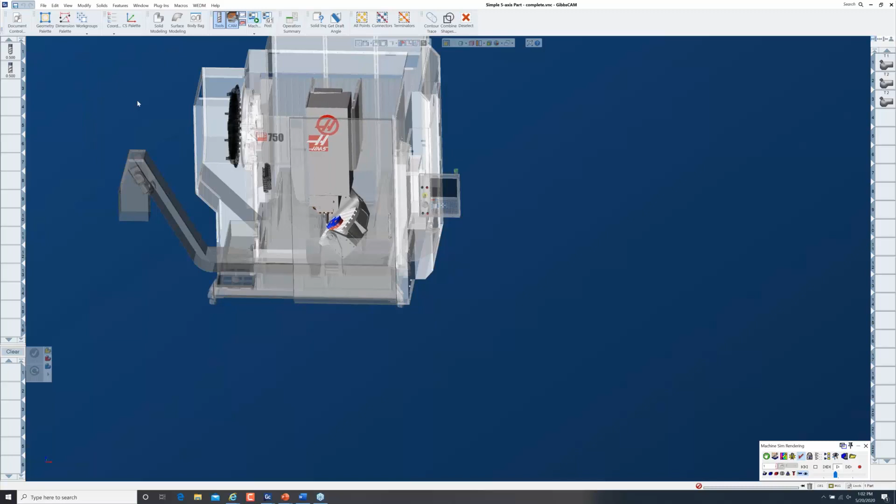Over the last 38 years or so, GibbsCAM has built their reputation by simplifying complex CNC programming. Part of the simplification is simply organizing the information and parameters needed to fit the way a machinist thinks, the way that a machinist basically approaches machining a part.

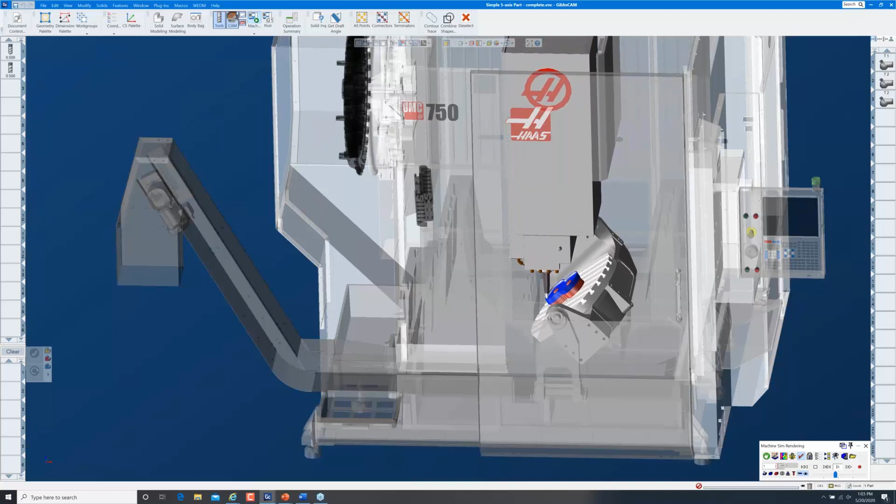By effectively streamlining and organizing the input of parameters and minimizing how many parameters you have to deal with, GibbsCAM shortens the learning curve, greatly reduces programming time, and most importantly, leaves you in control of as few or as many of the details as you want or need to be in control of.

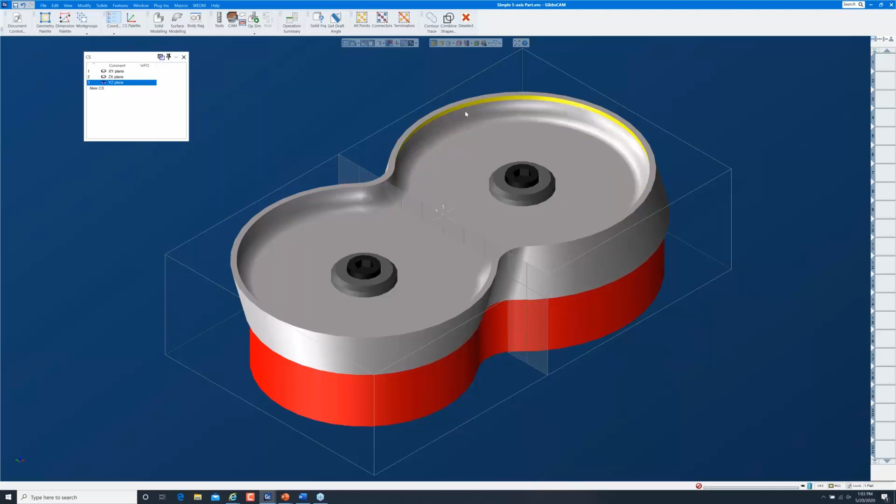All right, so here's the part we're going to be looking at. Let's see how this toolpath was developed. To start off with, I'm going to take a look at what we have to deal with. What I'm concerned with right now is machining this radius here. I'm going to turn on the profiler for a second and go to an end view here.

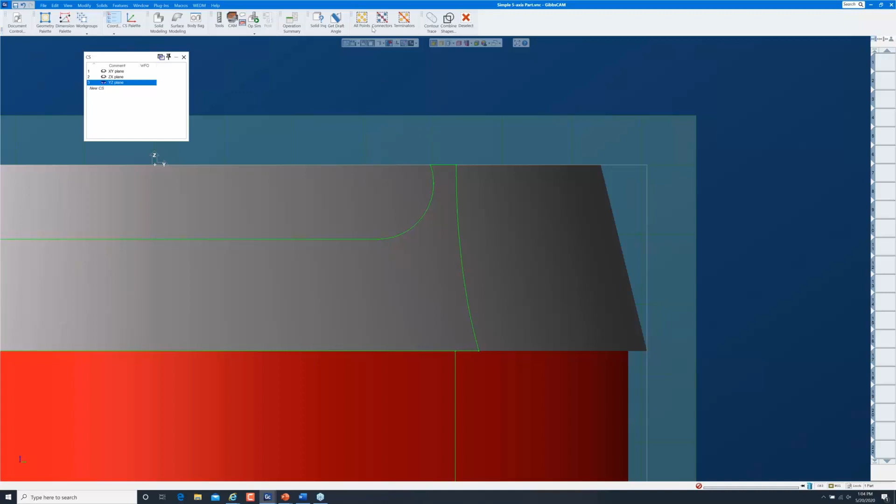Right here you see that this radius is actually undercut slightly, which would make it really impossible to machine with a ball end mill in a 3-axis machine. So we're going to machine this in 5-axis mode. Additionally, if I take a look at that radius, it's just under a 3/8 radius, so we'll machine that with a 1/2-inch ball mill. So let's get started putting some toolpaths together.

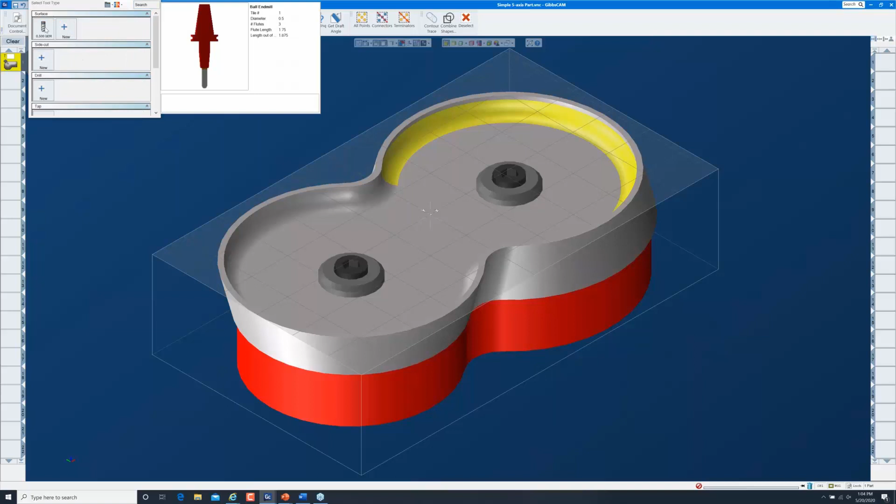So I'm going to open up my CAM and create a 5-axis process. And I'll select this 1/2-inch ball mill. When I build a 5-axis process, I'm presented with a dialog specific to 5-axis processes.

Just like any other GibbsCAM process dialog, it separates the groups of parameters and controls into individual tabs. Within those tabs, particular types of parameters and controls are separated into different areas. This makes it a lot easier to focus on individual toolpath control challenges and really helps you focus on the trees rather than getting bogged down in the forest.

When you're programming complex parts, the job often becomes a lot simpler and certainly less intimidating when you break it down into individual toolpaths rather than becoming overwhelmed by the overall complexity of the job.

So looking at the tabs, we have a number of tabs. There's 7 in this particular environment. We're looking at options right now, and this allows us to set our speeds and feeds for the toolpath, how we want the retract to behave, a rapid or a feed retract, our coolant options, rotary duplicates if we want them. We can duplicate our toolpath around the platter, if you will, and the machining coordinate system, the coordinate system that we want the toolpath to occur in.

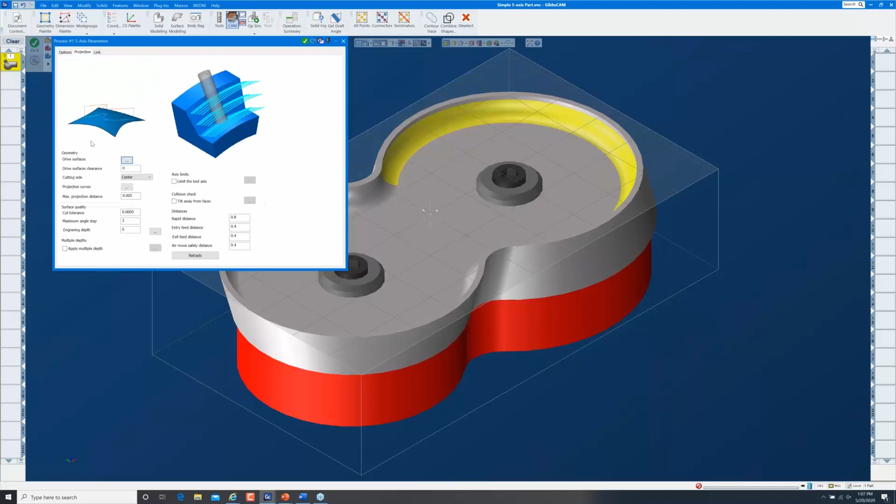What happens when we select one of these is that the software in the background sets a lot of the parameters for us, parameters that are generally specific to that type of machining, and reduces the amount of data that we have to enter. So you can see for projection machining, a pretty simple page to fill out, and then a linking page, which we'll go over later.

Another thing to keep in mind is that if you're creating a specific toolpath type, and maybe there's some aspect of that toolpath you're not entirely happy with, you can go back to the general setting, and those preset parameters are still valid in these other tabs. If we recreated the toolpath, it would be exactly the same as it was in the projection tab, but we can go in and access control over any aspect of the toolpath and tweak it.

A byproduct of that is it's a really good idea anytime you're starting a 5-axis process to hit restore defaults, just to make sure all the settings are what you expect them to be. So let's move on to the Surface Paths tab.

Now the Surface Paths is where we define the toolpath as far as the intersection or the contact point between the cutting tool and the surfaces being cut. And we can calculate that based on a number of things, including surfaces, the underlying triangle mesh, or wireframe, swarf machining, multi-axis machining, which has some really nice roughing patterns in it, including adaptive roughing and 5-axis.

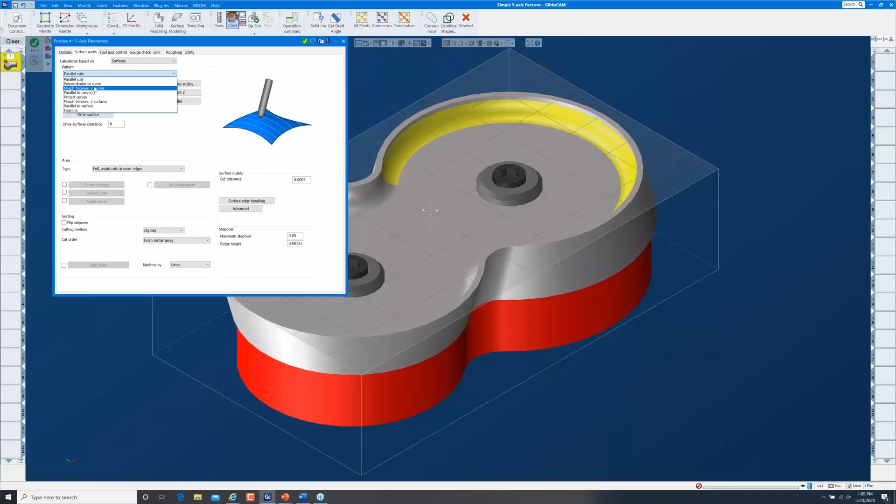We have a choice of parallel cuts, and I would encourage you to kind of watch this diagram over here, this picture, which will change as we select different things. So we can see that a parallel cut is essentially straight line parallel cuts. It's very similar to a lace cut in 3-axis surfacing, except it's in the 5-axis world.

We can create toolpath perpendicular to a curve, where we create some sort of curve, and the toolpath will always run perpendicular at the point at which it crosses the curve. The curve does not have to be a straight line like this shows. It can be a complex curve.

One of my favorites is morph between two curves, which starts with one shape, the toolpath following that shape, and as it works its way across the drive surfaces, the surfaces that we're cutting, it transitions to a different shape at the other side. We can also run parallel to a curve.

We can project curves. We can morph between two surfaces, which is very similar to morph between two curves. We can run parallel to a surface or create flow line machining. For this part, I'm just going to select morph between two surfaces.

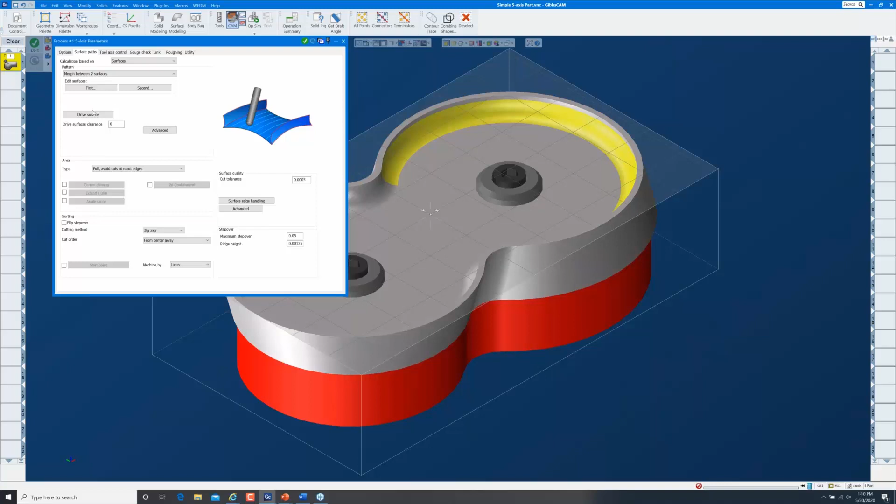So to get started with my toolpath, I need to start making some definitions of what I want to cut. I'm going to define my drive surfaces first. So I'm just going to right-click down here and select all of those surfaces, deselect that, and that leaves me with my undercut radius as the surfaces that I want to machine.

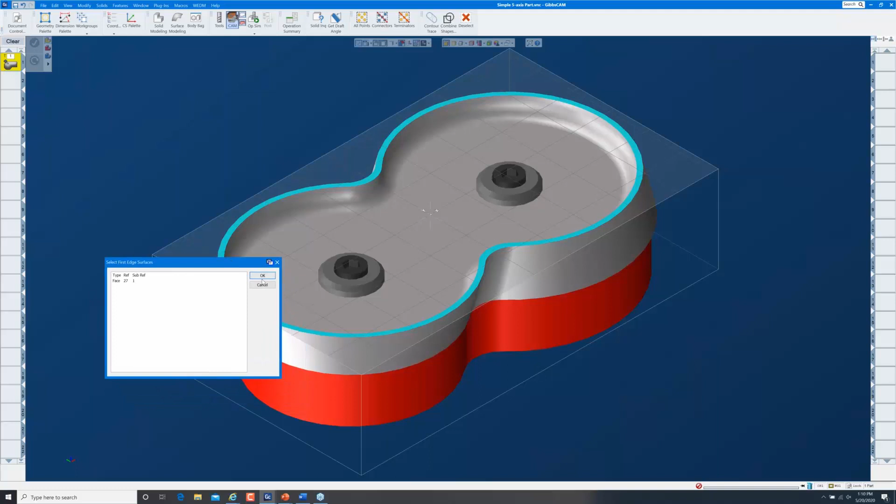Now, I've got edit surfaces that I need to define. The first edit surface is going to be this surface up here. And I'm going to click OK. And by the way, I forgot to mention, if you're in a dialog and you have an OK button in 5-axis especially, click OK to get out of that dialog. Because if you don't click OK, you lose the settings that you have set in that dialog. You need to click OK to accept those settings.

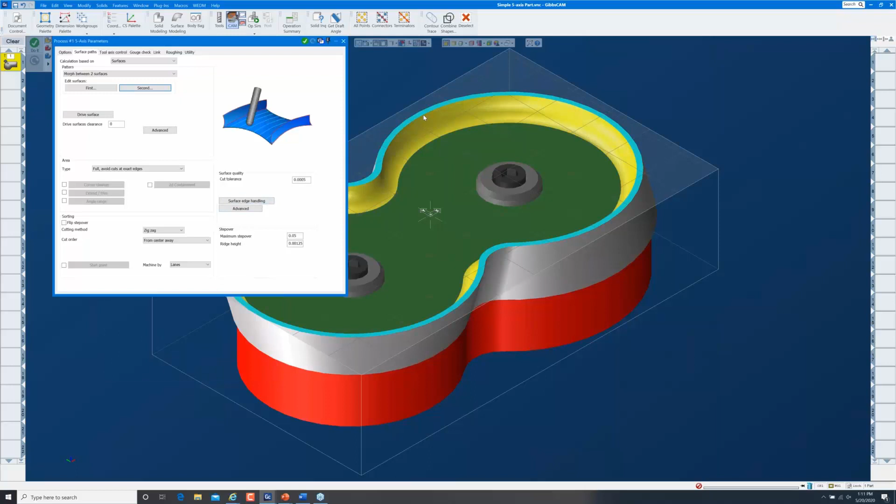So what I just did by defining this blue surface as my first edit surface, my toolpath is going to begin where the drive surface, the yellow surfaces, intersect the blue surface. I'm going to define my second edit surface as this one. All right, so we're going to start cutting at this intersection. We're going to finish cutting at this intersection.

In addition, we could define a drive surface clearance, and again, the picture changes to show us what they're talking about. So this tells me that a positive number in there will actually stop short of the tool reaching the actual surface by whatever amount you enter in that field. 0 will put the tool exactly on the surface, and a negative value will impinge the surface, or it'll cut into the surface by the amount specified. This part's already been roughed, so I'm going to cut right to the finished surface.

Then we can move down to the area. These are essentially modifying the area being cut. It may seem redundant since we've said we want to cut this yellow area, but we can tweak that somewhat. We can do a full cut but avoid cuts at the exact surface edges. This is going to step over the amount that we specified, but it's going to avoid making a pass at the exact edge of the surface.

Or we can cut the full shape and force a start and end at the exact surface edges. This will modify the step over and force a pass at the exact surface edges, which is what we're going to do here. Alternately, we can control the area cut by the number of cuts or limit it by 1 or 2 points. So we're going to do a full cut starting and ending at the exact surface edges.

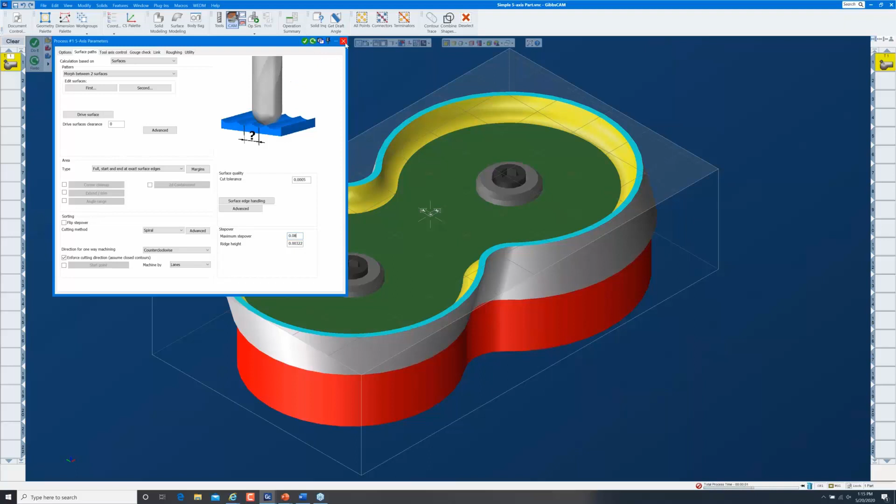And then we have our maximum step over. It defaults to 0.05. I'm going to bump that up just a little bit for toolpath calculation speed here at the beginning while we're still tweaking toolpath. And I'm going to go ahead and click Do It and see what the results are. I'm going to also come down here and open up my progress bar and lock it in place so that I can kind of keep track of what's going on.

And what we end up with here is what looks, at least at first glance, to be beautiful toolpath. It's a very nice spiral. There's no abrupt step downs. It's just a smooth spiral toolpath. Cuts beautifully from the beginning of that surface to the ending of the surface. And if you don't look too closely, you might be initially pleased with this right up until the point where you simulate it. So I'm going to go to my Operation Sim, and sorry, one thing that I need to fix here.

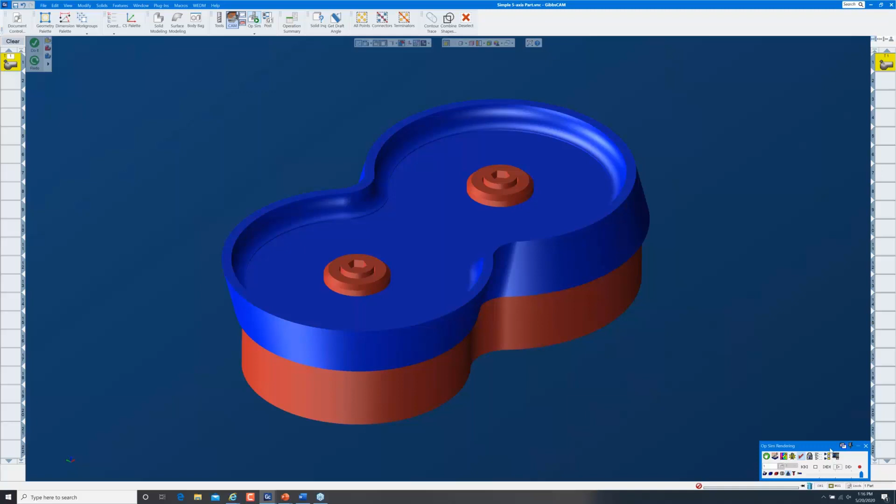I'm going to go to my Operation Sim and watch this run, and it's not really going to be as pretty as we had thought it would be. I'm going to move this, it's a little more convenient, and hit play. And so that's probably not the best strategy for getting into the part and not the best way to tilt that tool while cutting this part.

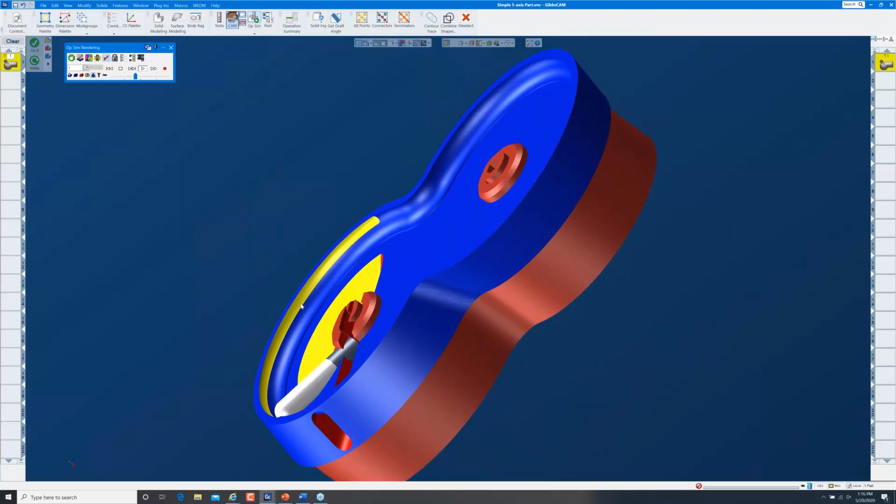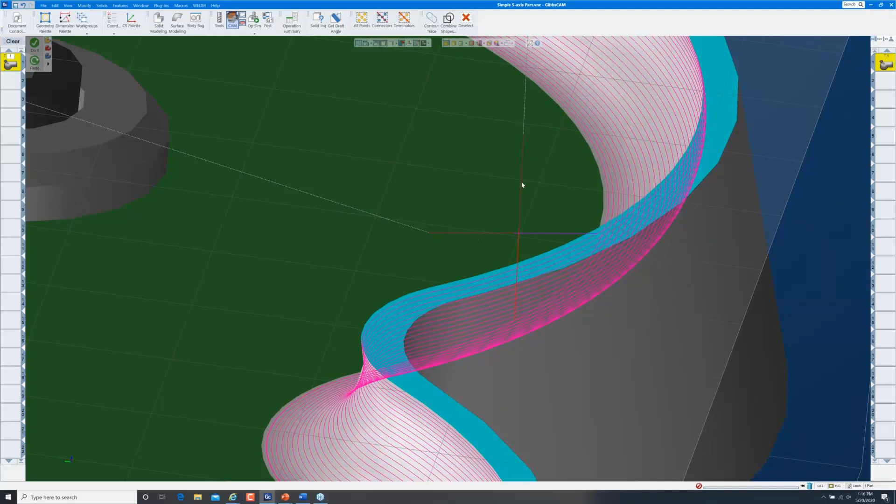But if you look at the toolpath, the point of contact between the tool and the part is good. What we fail to do is to adequately control the axis of the tool or the center line of the tool. Some people think of it as controlling the back end of the tool. Once you have some time in this environment, you would have realized right away just by looking at this entry move and this exit move that the tilt of that tool was not quite what we had in mind.

All right, so how can we control that? Let's take a brief look at our process. And we can see that we looked at options, we looked at surface paths, and then the next tab is tool axis control. And that's what we need to do, is we need to control our tool axis. So again, we're breaking this down into pages that deal with the same set of tasks, if you will.

So one thing we have here is the ability to limit our toolpath to 3-axis or 4-axis, or we can produce full 5-axis output. Of course, we're going to produce full 5-axis output here. We have a maximum angle step, and this is the maximum angle that your platter can rotate in a single toolpath node. And then here's really what we're concerned with, how the tool axis is controlled.

The tool axis will be tilted relative to the cutting direction. Well, tilted relative to the cutting direction with zeros in both of these fields, 0 lead or lag angle and 0 side tilt, effectively keeps that tool perpendicular to the surface being cut, which is exactly what we saw here.

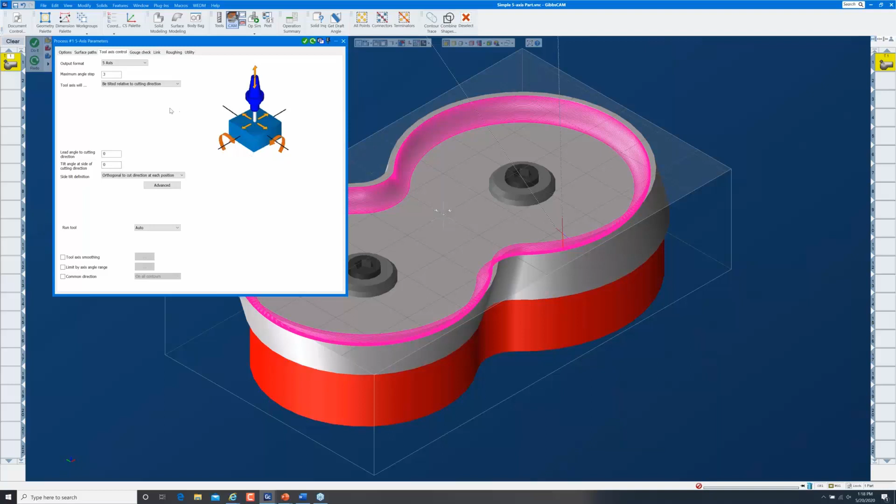Other choices here are to not be tilted but stay normal to the surface, tilted with a specific angle, tilted with a specific angle relative to an axis, or rotated around an axis, or tilted through a point or tilted through a curve. Now these are very, very useful.

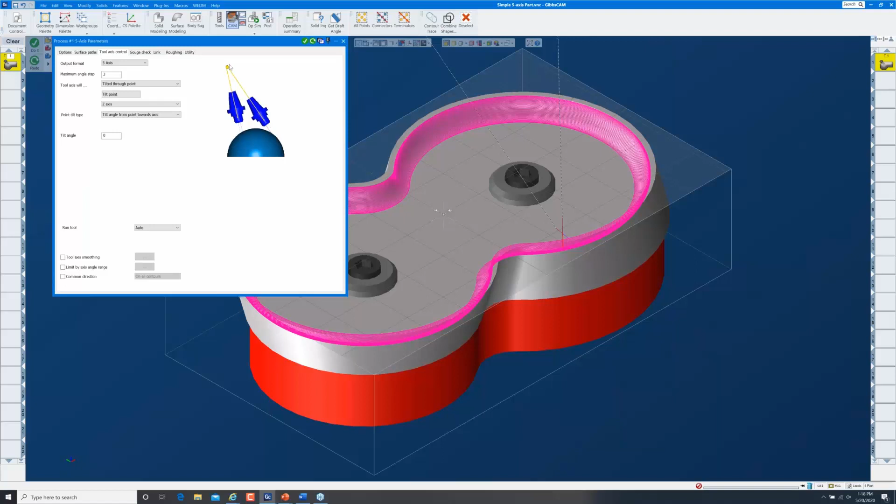Tilted through a point or tilted through a curve requires a point or a curve that is behind or above the cutting tool when it's cutting, and the center line of that tool projected back through the holder, if you will, always be pointed or oriented to that point or that curve.

Conversely, we also have tilted from point away and tilted from curve away, which is kind of the opposite. You have a point or a curve that's below or projected along the axis of the tool through the point of the tool, and the tool will always stay pointed toward that point or that curve.

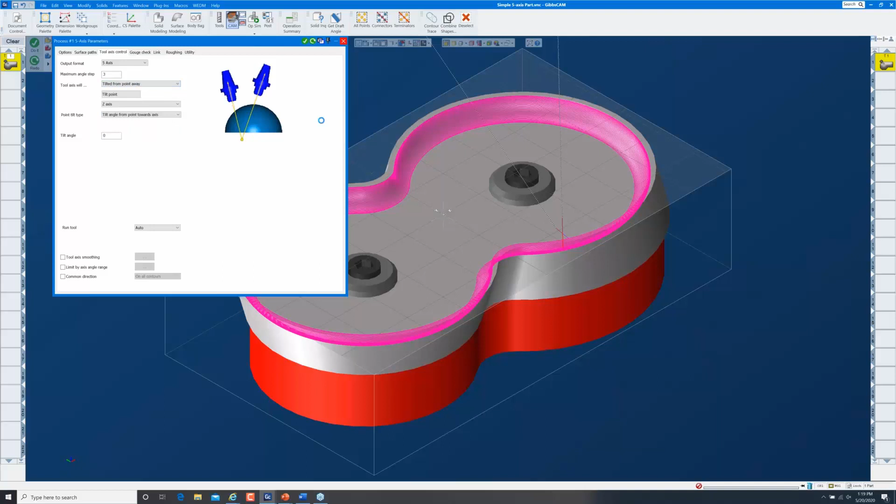So I think the strategy that I want to use here is going to be tilted through a curve, and really before I can do that, I need to have a curve to tilt it through. So I'm going to select the surface and just extract the edges of it. And then I'm going to take that curve, and in my geometry palette, I want to offset it. And I'll offset it an inch. I'm going to get rid of the geometry that I don't need, and I'm left with this.

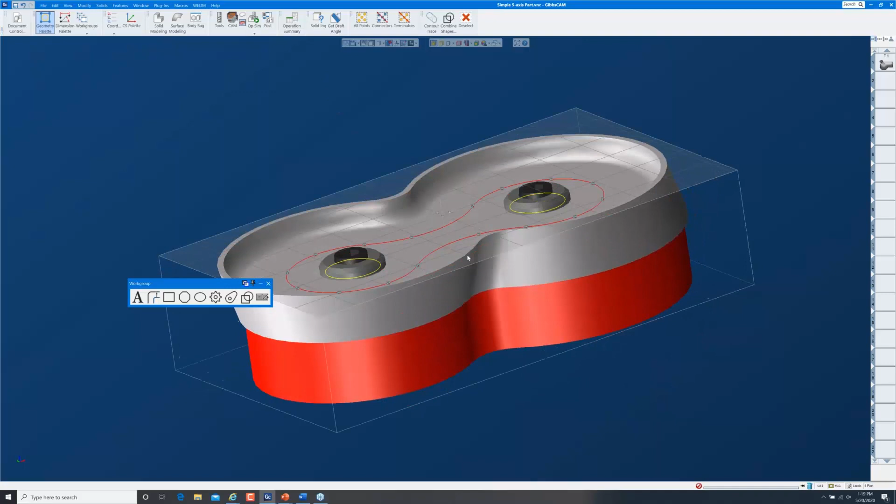All right, so this is a curve that's kind of parallel to, but inside the shape that I'm cutting, smaller than the shape that I'm cutting. However, with it being down on the floor of this pocket, it really doesn't do me any good, because if I project the center line of my tool through this, I'm still gouging, so I need to modify this somewhat.

So I'm going to translate this up, and I'm going to go, say, a 1/2 inch a couple of times, and maybe one more time. So that's 1.5 inches above the floor of that pocket. And then I can test that quickly just by rolling this thing around and lining this up with the matching portion of the surface behind it, and get an idea of how much tilt is going to be required to get the tool there.

And that's a good amount of tilt. I'm pleased with that. I'm not risking hitting the back edge of the part with my tool or my holder, and I can easily get to that undercut there.

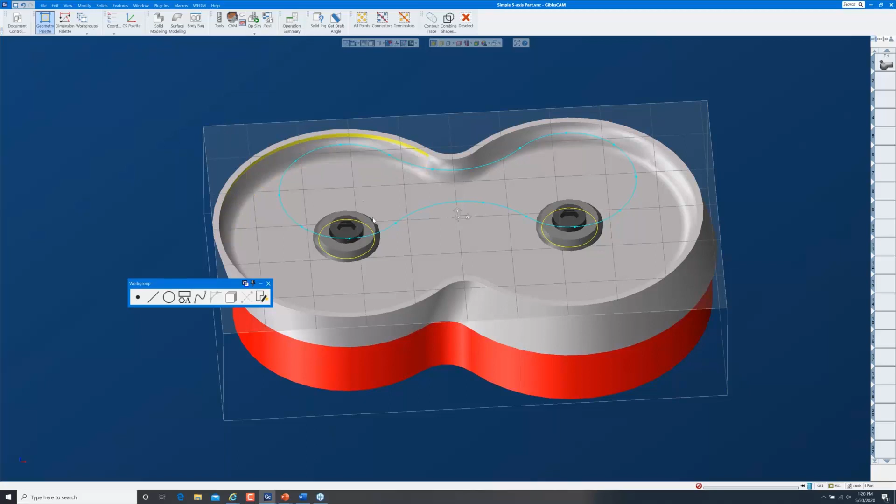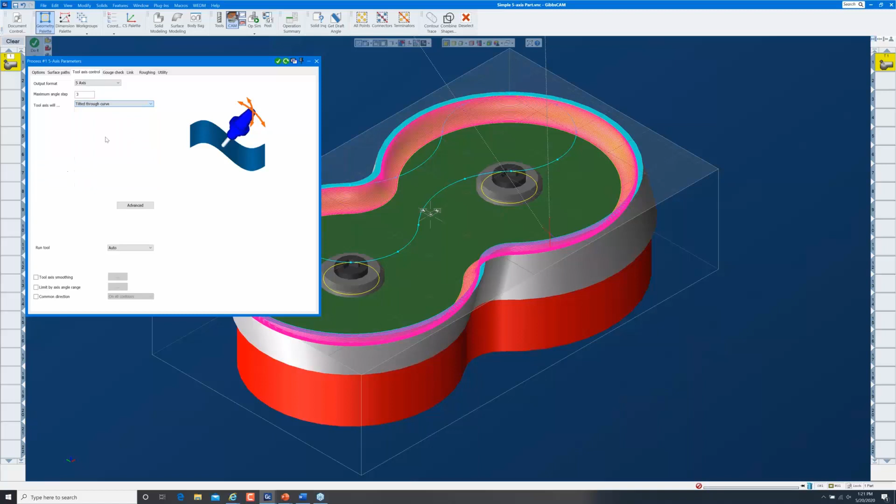So with that built, I'm going to load my process back in, which reselects everything, by the way, rebuilds my toolpath and reloads my process with all the parameters set the way that they were when that process was built. So all I need to do to tweak this toolpath is come over to my tool axis control and come down and say, I want my tool to be tilted through the curve. And my tilt curve is going to be that.

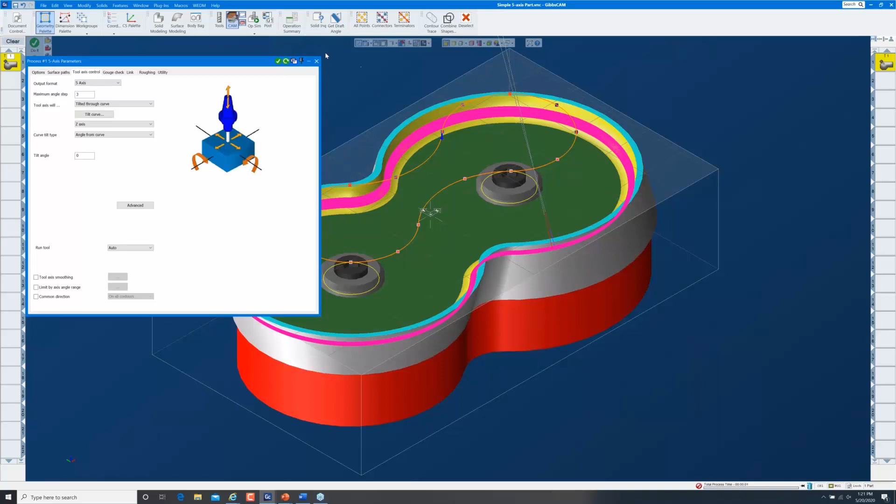And hit OK. We'll recalculate the toolpath, and if you watch our entry and exit move here, you should see them realign with our tilt curve. And you see now they're projected toward that tilt curve. So let's go back and watch the simulation again.

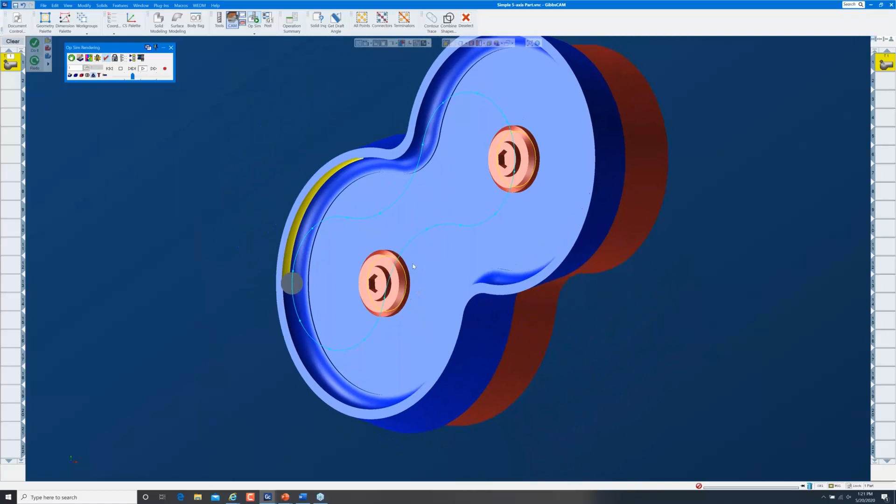And this time I'm going to lock the simulation to the machine. I'm going to start it simulating, and we see the tool comes down without crashing through the part. If I go to home view, I'm going to be looking straight down the tool, right down the center line of the tool. And you can see that our tilt curve stays right in line with the center line of the tool right there. So controlling the tilt while it's doing this cut is very, very simple.

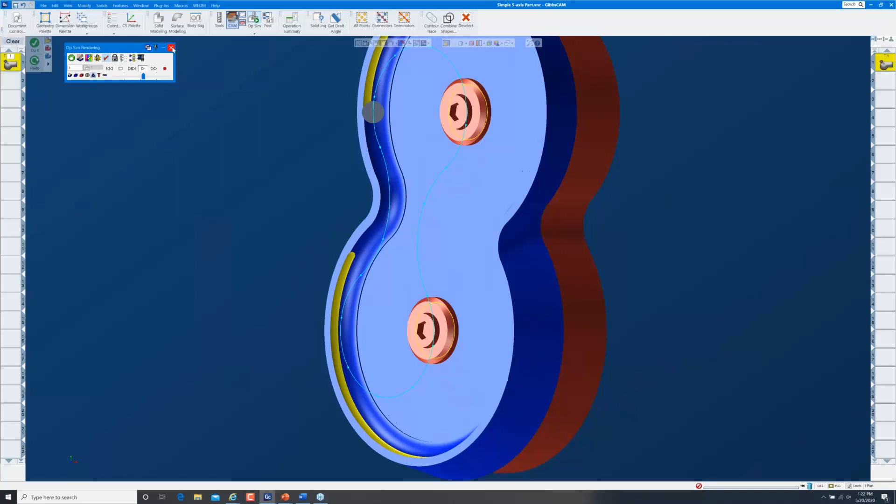Let's take this a step further. A lot of parts aren't really this simple. They may be simple, or they may be very, very complex. But perhaps this part has more features to it than just what we see here. Maybe there's features back over in here, and some of those maybe overshadow or overhang this pocket slightly, and that can be simulated like this.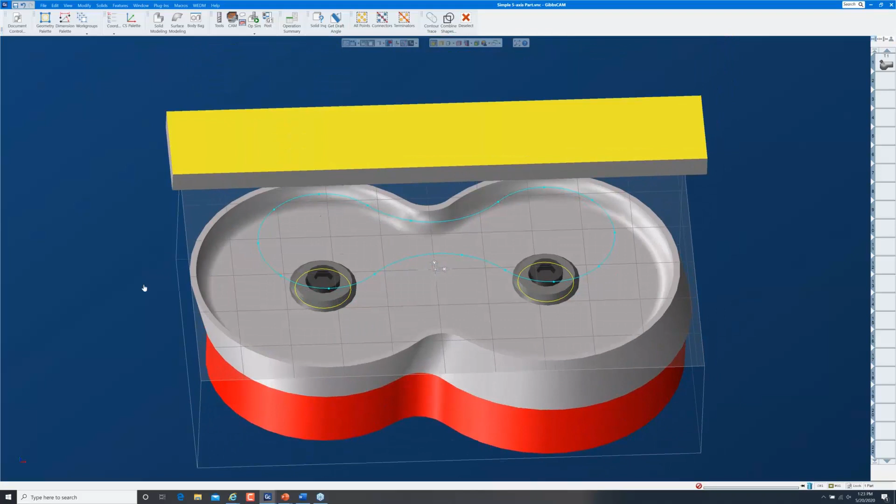So we have this piece. If we highlight that and go to a top view, we can see it overhangs our pocket a little bit. And I believe that's going to be enough that we get a gouge. We need the tool to stay away from this, but we still need it to tilt and get the undercut here without gouging.

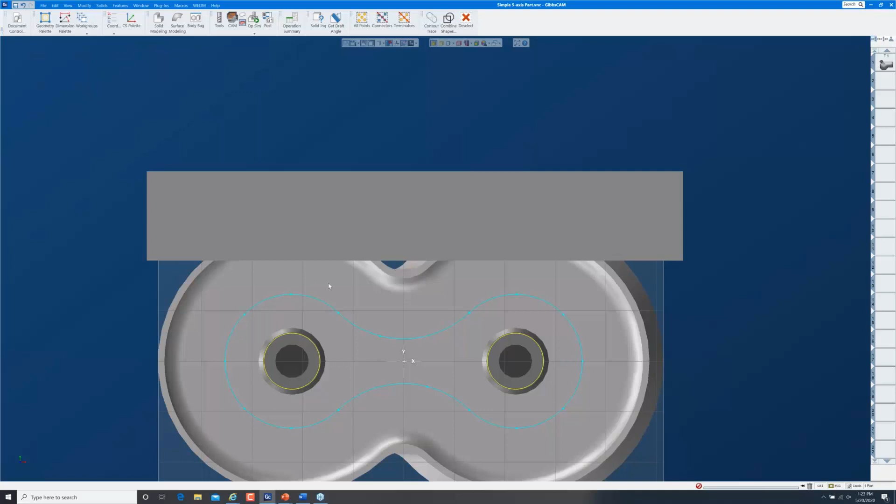Now there would be a tendency here to tweak or to change this geometry that we're using for our tilt curve to pull this side of it back a little bit to force more tilt so the tool can get up underneath this. But that's really not necessary. What I'm going to do is turn this into stock so that we can see it in our rendering. Let's just watch that run briefly.

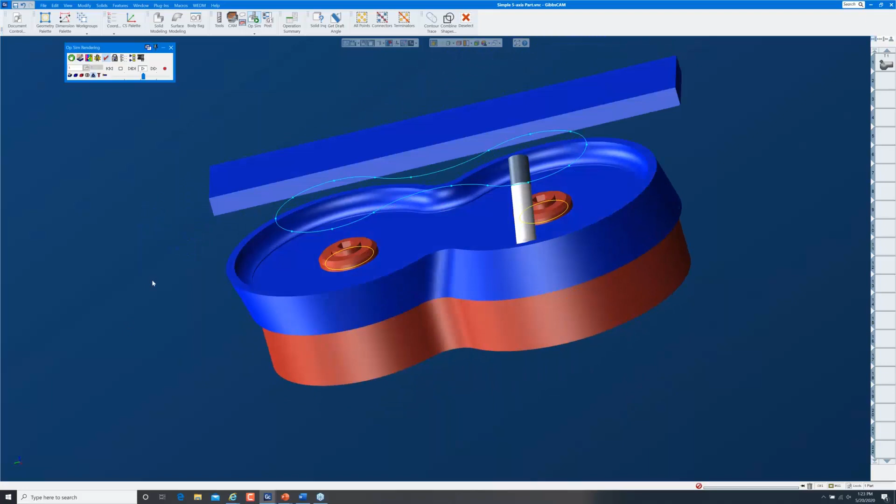I'm going to lock that to part this time. I just want to see it come around here, and we should see that we're gouging. We're scalping this feature here just slightly. And again, just imagine that this is some feature of the part that just kind of gets in the way.

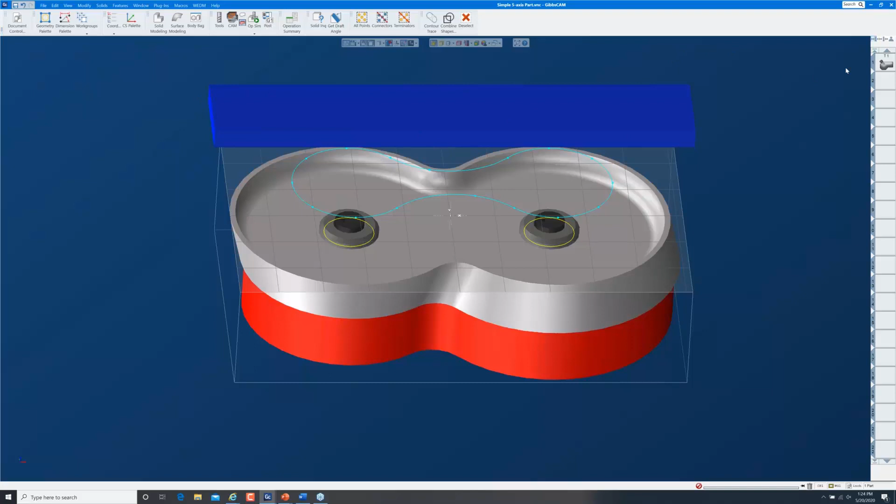So rather than really changing our geometry here, what I want to do is go into my process and do gouge checking. So I'm going to go into the gouge check page, and GibbsCAM allows you 4 gouge check strategies that can be run together, and they'll actually run sequentially, or they cascade. I only need 1 gouge check strategy, so I'm going to turn 1 on, and I can check the flute and/or the shank and/or the front of the holder and/or the back of the holder.

In this case, I probably just need to check the tool. I'm not too concerned about the holder, so we'll do the flute and the shaft. Now, this column allows me to say what I want to happen if it detects an approaching gouge. Retracting the tool is very good in some situations, but in this case it doesn't help us. What I need it to do is to tilt the tool. I want it to tilt the tool, and very often automatic works great for this. I'm just going to leave this on automatic.

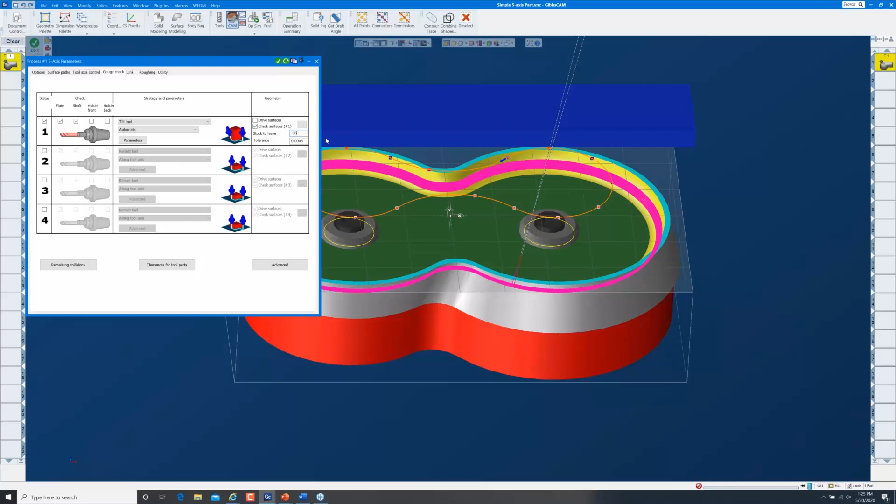And then what do I want to gouge check against? I don't need to gouge check against my drive surfaces, the yellow surfaces, they're fine. But I do want to define some check surfaces. So half a thousandth tolerance is fine, maybe a bit tight, but it's fine. And how much stock do I want to leave? How much distance do I want to have between the edge of my tool and the surface that it's checking against? So I'm just going to give it a 1/16 of an inch.

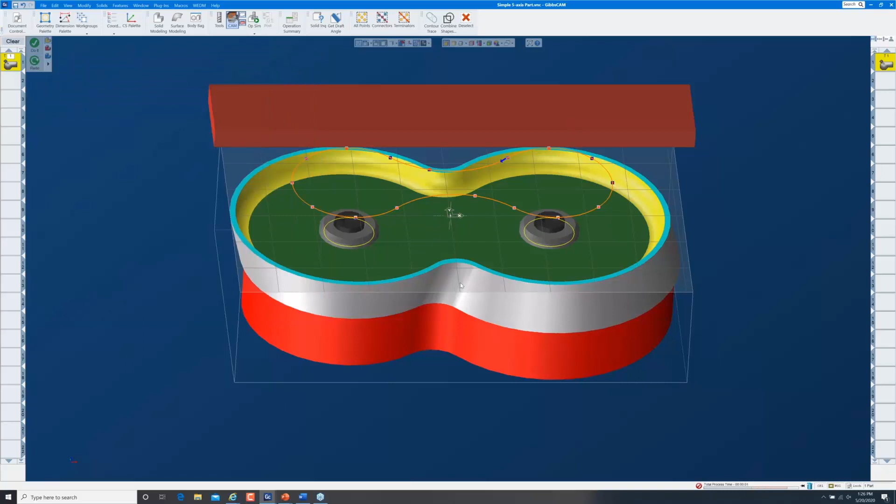And then what are my check surfaces? I'm going to define those as being that entire body right there. And with that done, I'm going to hit redo. Let the toolpath recalculate. And I'm going to go down to an end view here and go back to my simulation. I'm going to put my point of view lock on fixed part and run this. What I want to see is if that tool is tilting. I'm going to slow it down a little bit.

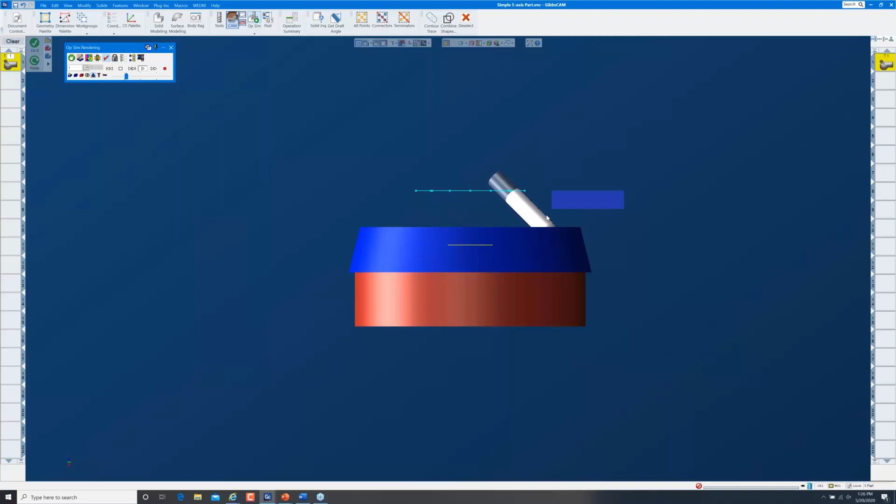And you can already see that it's tilting below the curve as it comes around here. It's tilting more than it was on the other side to keep the tool away from the surfaces that we're checking against. I'm going to rewind that and change my point of view to the machine. And again, go to a top view, so we'll be looking straight down on the tool. And here you see our tool is centered up just the way we told it to on our tilt curve.

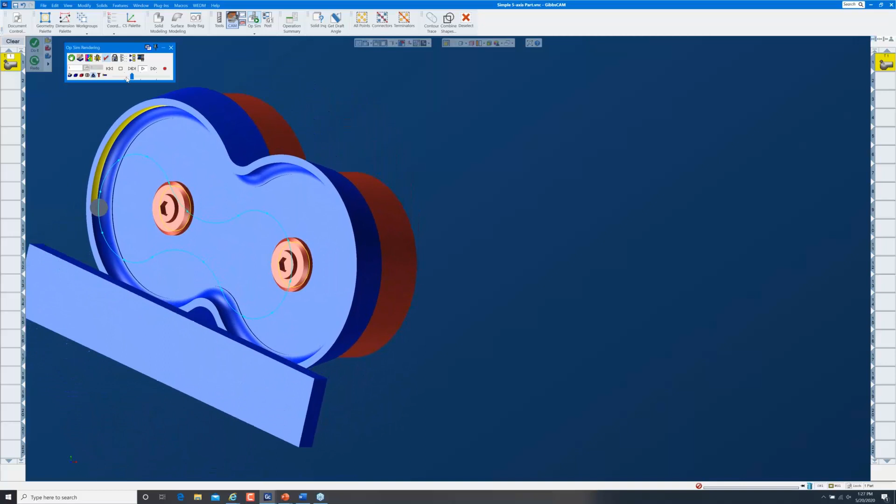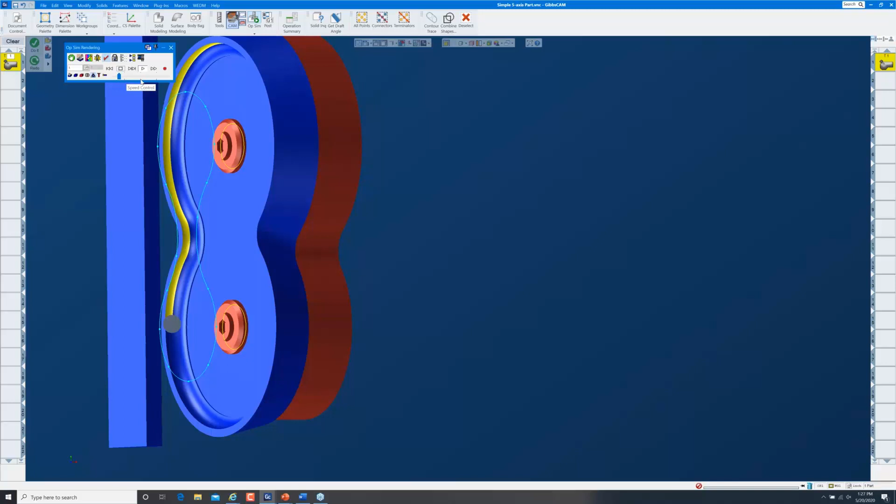And somewhere along in here, it should be detecting an approaching gouge, and we see that tool start moving off of the tilt curve until it's completely off the tilt curve, and then it comes back on, but it never quite makes it centered up on it, and it tilts back off over on this side. And then as we come on around, away from the interference, the tool lines back up with the tilt curve.

So I showed you that just to kind of emphasize that it's not an abrupt change. It's a very smooth transition. It detects the approaching gouge. It starts making adjustments for that ahead of time.

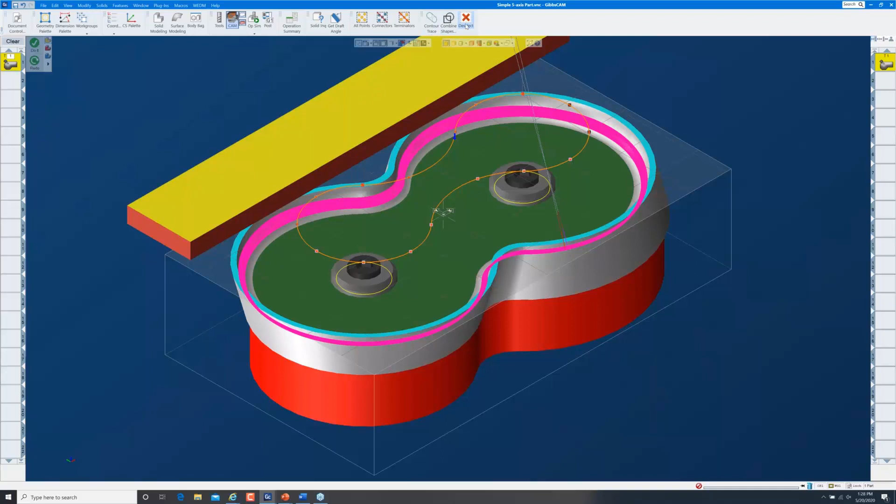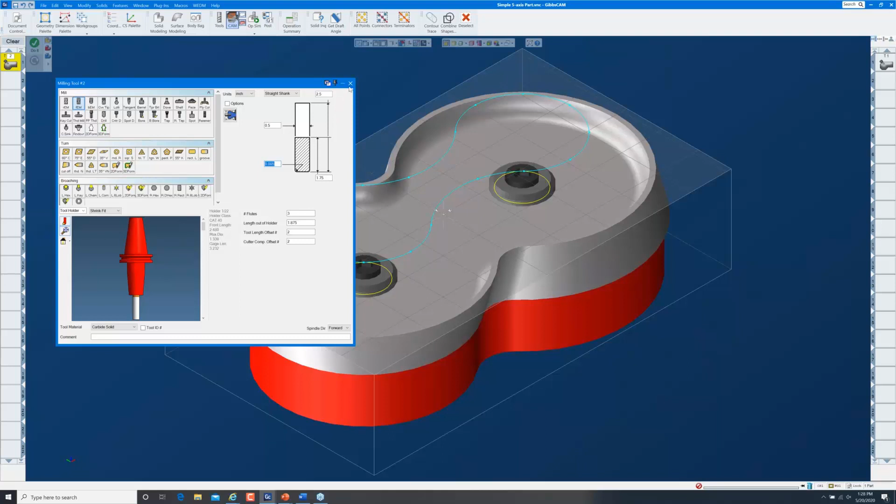I'm going to deselect everything, and let's go ahead and finish this part. I'm going to open up my CAM again. Let's do a little more machining. I'm going to clear that process out. I'm going to create another 5-axis process. And for this one, I need a finishing end mill. It's going to be a square end mill. A little bit of corner radius won't hurt. Those settings are fine. And I'll open that up.

And since I'm going to change the style of machining pretty significantly, I definitely want to hit Restore Defaults on this. I'm going to go to my Surface Paths page. And for this one, instead of my calculations being based on surfaces, I want to base my calculations on swarf machining. And swarf machining is where you cut with the side of the tool, and it's a great way for finishing ruled surfaces, surfaces where you can create a direct line from one edge to the other at some angle. So we're going to do swarf machining.

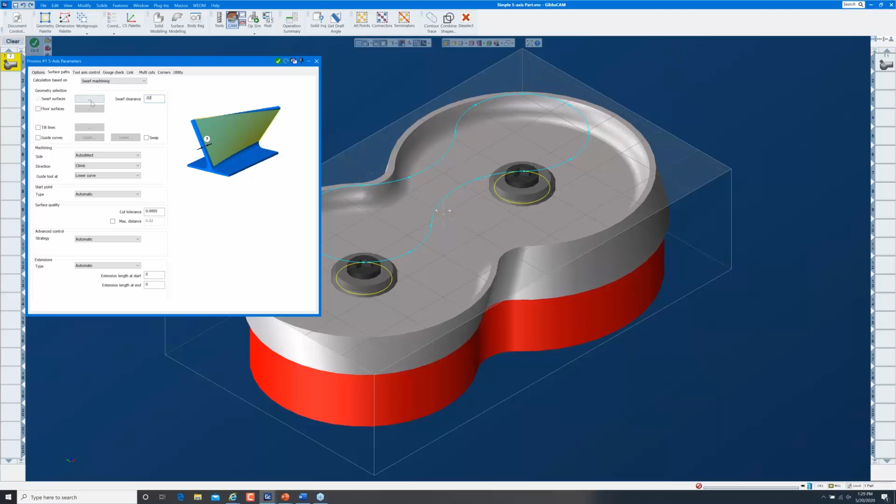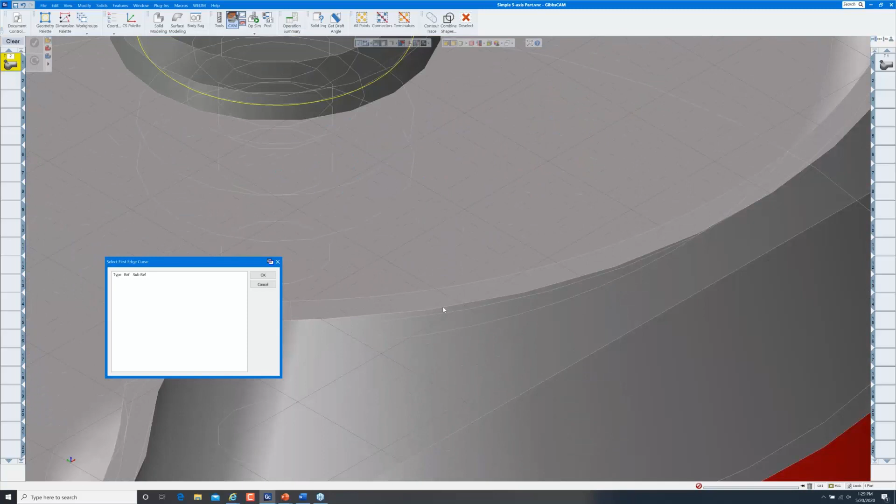And this is going to be a roughing pass, so I'm going to keep the tool 20 thousandths away from the finished surface. And I'm going to define my swarf surfaces as being these. So that's what we're machining. And then instead of using tilt lines, I'm going to use guide curves. So I'll turn my edges on and select my upper guide curve as this. And I'm going to select my lower guide curve as that.

All right, so we're saying 20 thousandths away. I've defined my upper and lower guide curves and my swarf surfaces. Now, this is a roughing pass, so I'm going to go to multi-cuts. I'm going to tell it to do this in 2 slices. So it's going to cut halfway down and then the other half. And then in addition to that, since the bottom edge of the tool is going to be controlled by this geometry here, I want the tool to go a little bit past that. I want to ensure that I don't end up with a wire edge down here. So I can do a tool shift along the axis right here. I'm going to give it a negative 30 thousandths.

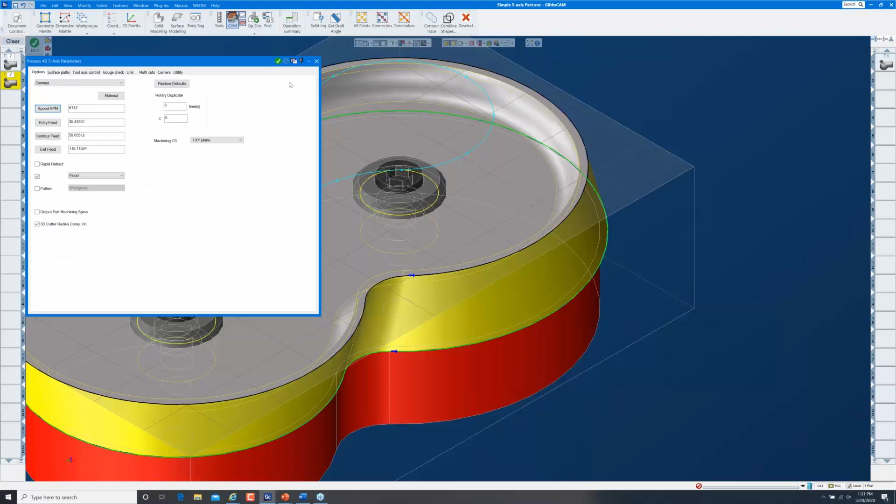And I'll close that. Let's go ahead and build in our finishing pass. I'm just going to use the same tool for it. And everything really can stay the same, except that I don't need to leave 20 thousandths stock. And I don't need to take 2 passes. I still want to overshoot the bottom by 30 thousandths though. All right, so with those set, I'm going to create that tool path, and we should see a halfway down roughing, all the way down roughing, and then a finishing pass here. And that's exactly what we have. This is our cut halfway down, leaving 20 thousandths stock. Our cut 30 thousandths past the bottom, leaving 20 thousandths stock, and our finishing pass.

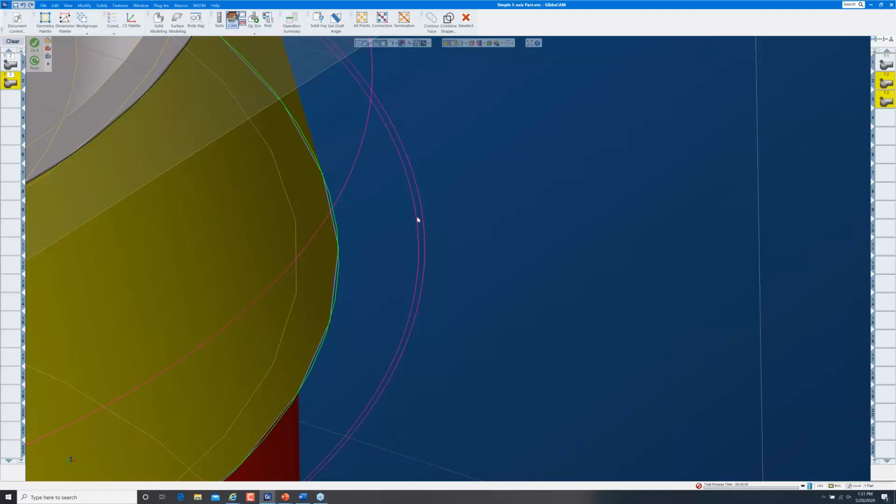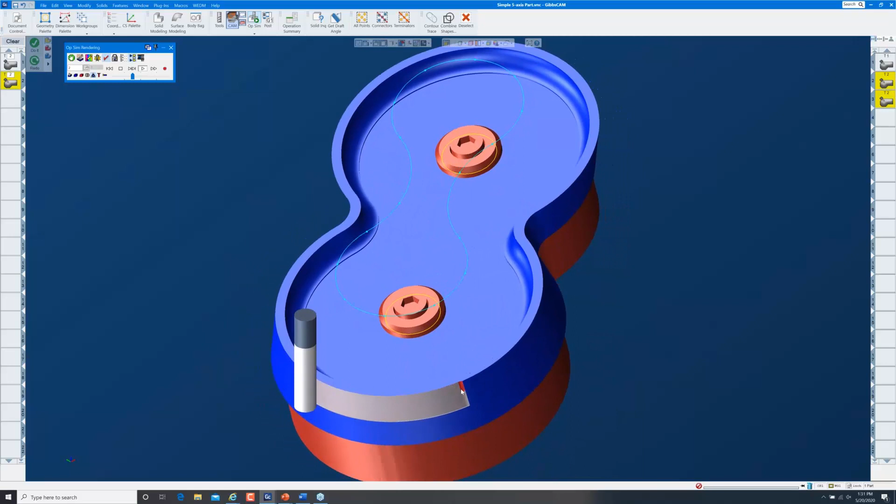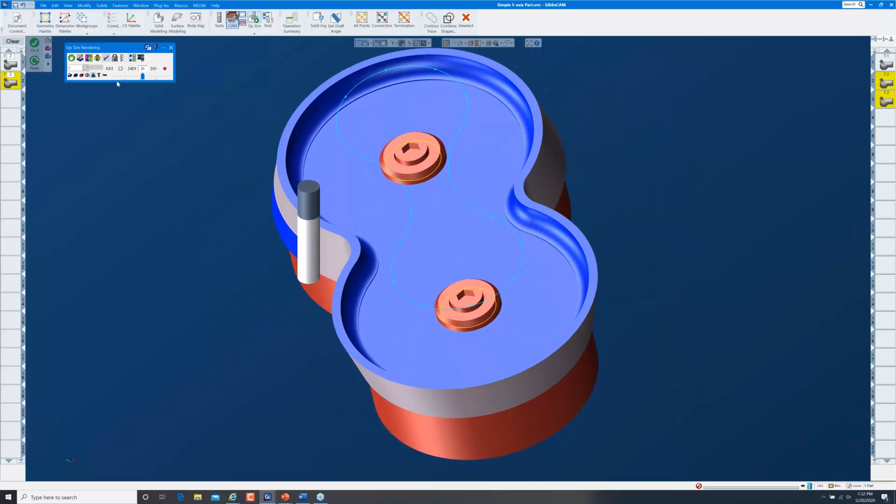So let's see that simulate. Let's see just that simulate. All right, so here's our swarf halfway down, and we see that red right there is kind of warning me that the tool is rapiding in contact with the part, and I expected that because we haven't controlled that yet. I will go ahead and verify that the rest of the tool path is what I wanted. So that finishes up our roughing. And there's our finishing. And again, it's rapiding in contact with the part.

So how are lead in and lead outs handled in 5-axis? Let me just make sure this process is loaded. Let's go back into our roughing first. And lead in, lead outs, and really anything that has to do with how the tool gets from one place to another is handled on the link page. And we have several areas of control. Our first entry and last exit, everything about that is controlled here. Gaps along the cut, this would be if there were any void along the stroke, or a mathematical void, something that you can't see, but just because of tilting, that happens very occasionally, how that is handled.

You also have links between slices, which is a link between two different strokes or two different slices, and links between layers. If you're doing roughing, you have multiple layers and you can control how those are handled. So on the first entry, when the tool is first getting started, I want it to use a lead in. And when it gets finished, I want it to use a lead out. Okay, that's simple enough. And then the links between slices, I'm going to have it use a lead in. Actually, let's do a lead in and a lead out.

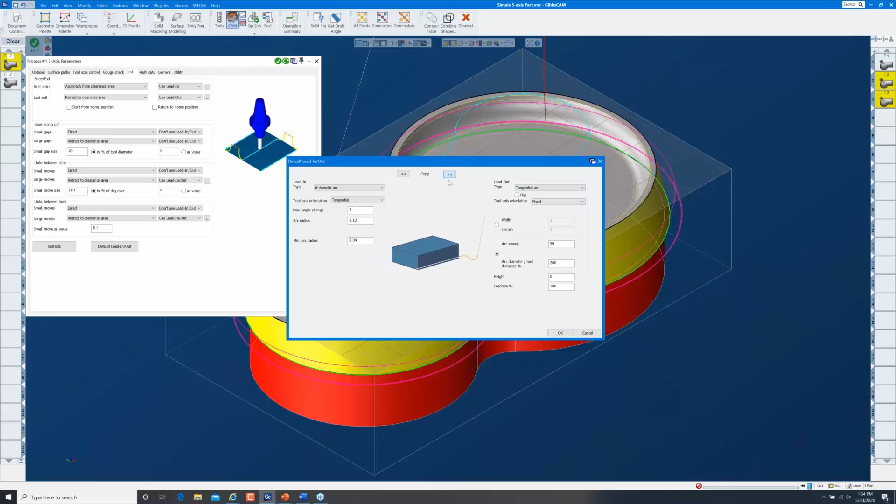So I've set my lead in style over here, and then to transfer this data over to my lead out rather than having to enter anything again, I can just copy it over. Hit OK, and recalculate my toolpath. Well, actually, before I do that, let me do the same thing to my finishing pass. Come down to link, and here all I'm concerned with is my first entry and last exit. And now we'll recalculate our toolpath.

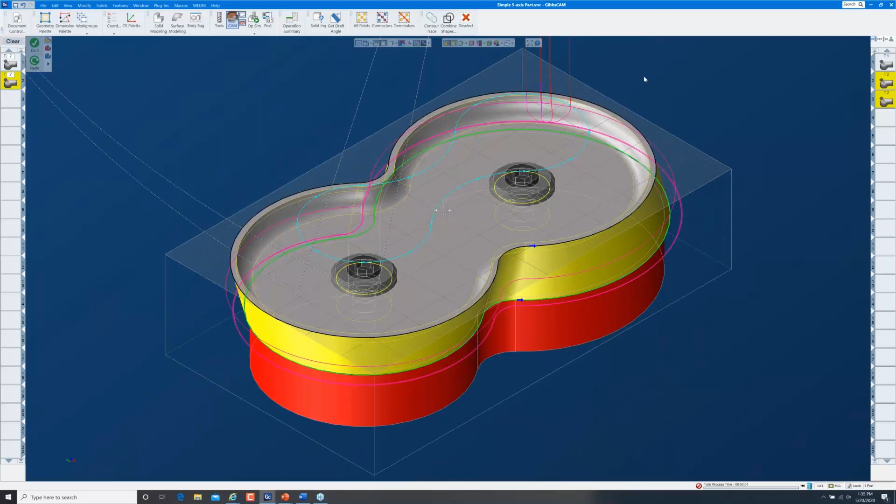All right, and there we have it. And you can see the entry exit moves over here, and we can run our operation simulation, again, just on the selected operations. And you can see the rapid in contact with the part is fixed.

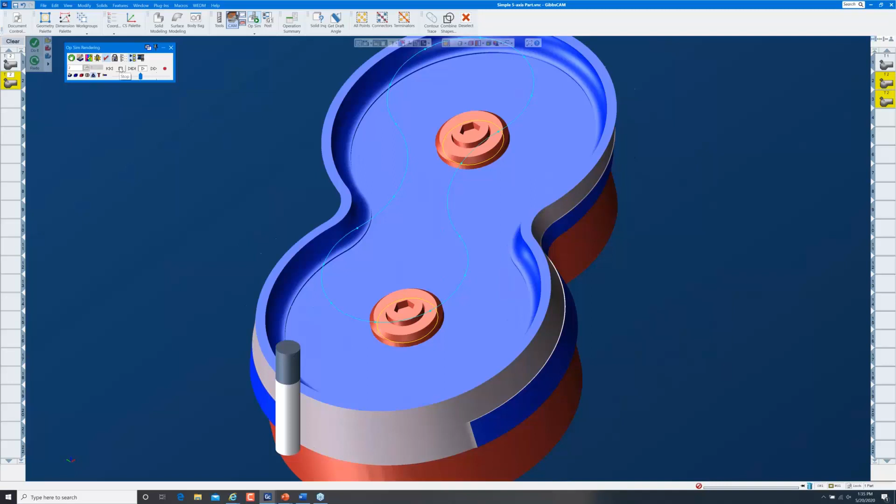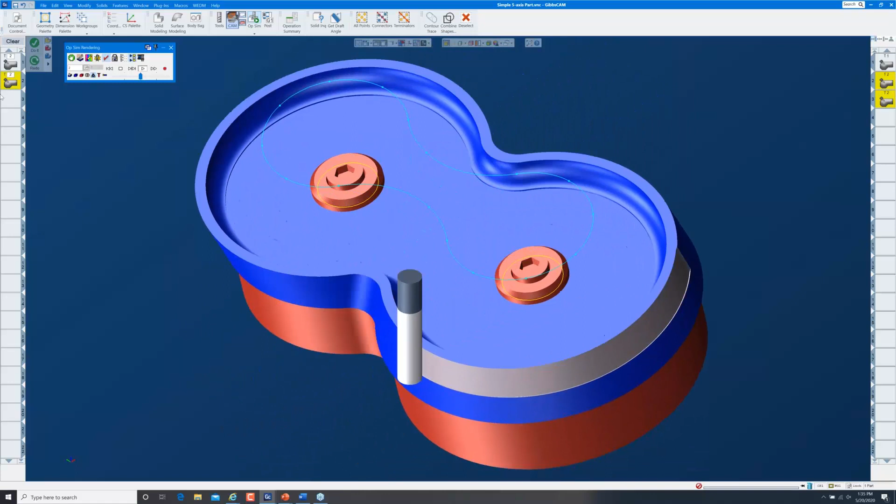All right, in the, I don't know, the last half hour, 35 minutes or so, we haven't gotten in a rush. We've taken our time, and yet we programmed a 5-axis finishing pass on the undercut radius. We tweaked that toolpath. We tweaked it again to provide gouge avoidance and developed roughing and finishing toolpath for a swarf profile. The task associated with developing these toolpaths is laid out in a simple, easily understood manner. It makes it easier to learn, it reduces the programming time, and lessens the risk of mistakes.

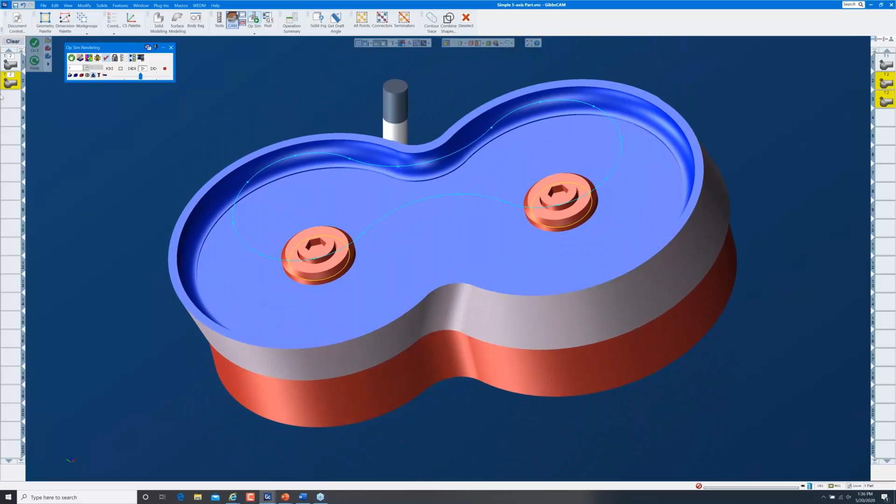The speed at which you can make these changes really lets you try multiple toolpath strategies to see what you like best. I used to call it playing what-if games. What if I change this? What if I change that? The changes are so quick to make, and the toolpath calculates so quickly most of the time that it's very easy to try a couple of different strategies and see what you like, what you think is going to fit your needs the best. That concludes the presentation portion of the webinar.

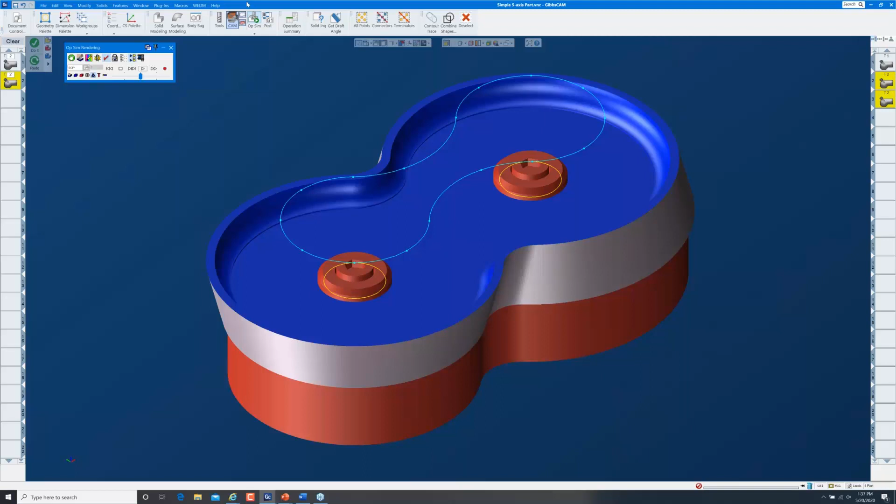Hey, we do have several questions, so I'll start with the first one, and this is a question for you. It said, you mentioned limiting the toolpath to 3 or 4 axis. Is there a benefit in buying the 5-axis module for shops that don't have a 5-axis machine? I would have to say yes, definitely. If a shop does a lot of 3-axis work, a lot of 3D work, especially molds and dies, or really, any complex 3D work on a fairly regular basis, the 5-axis module provides a lot of advantages.

You have additional very powerful toolpaths beyond those that are offered in the surfacing and the advanced 3D, which are also really good. But it provides you additional toolpaths to those. As you can see, it provides a lot of controls to those toolpaths.

Very often, providing faster tool path. The adaptive roughing in the 5-axis is phenomenal. There are just a lot of very fast, very high-quality tool paths that will greatly benefit somebody who only has a 3-axis machine or maybe a 4-axis machine.

All right, next question. Yeah, sorry about that. Next question, also one for you. It says, in the software I'm familiar with, I usually get a ton of retracts during 5-axis toolpath. Can you control that better in GibbsCAM?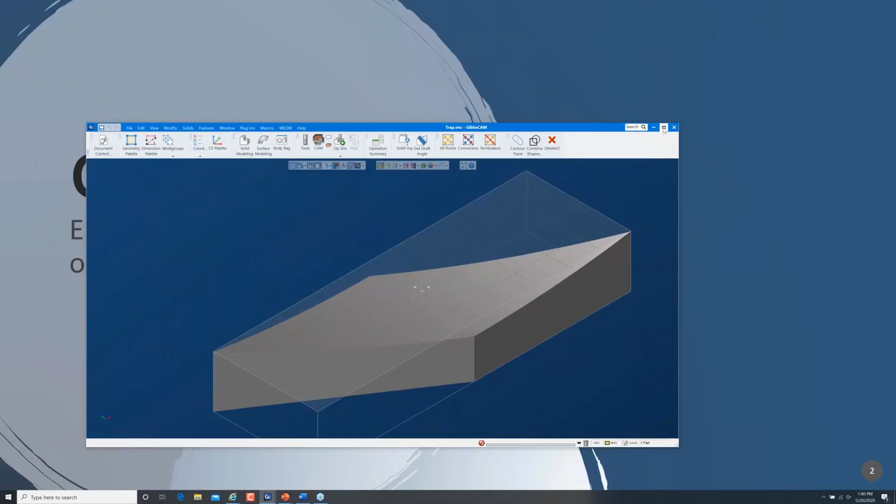Well, not knowing what you're coming from, I don't know better or worse, but you can certainly control it very, very well in GibbsCAM. The linking page, as I said, really kind of gives you control over how the tool gets from one place to another. Matter of fact, if y'all will bear with me for just a few seconds, let me pull up a part that I use in my training, and I use it for a little bit of a different purpose. But I think it will help explain this if y'all don't mind looking at just a little bit more toolpath. Bring that down. And this is just a real simple part.

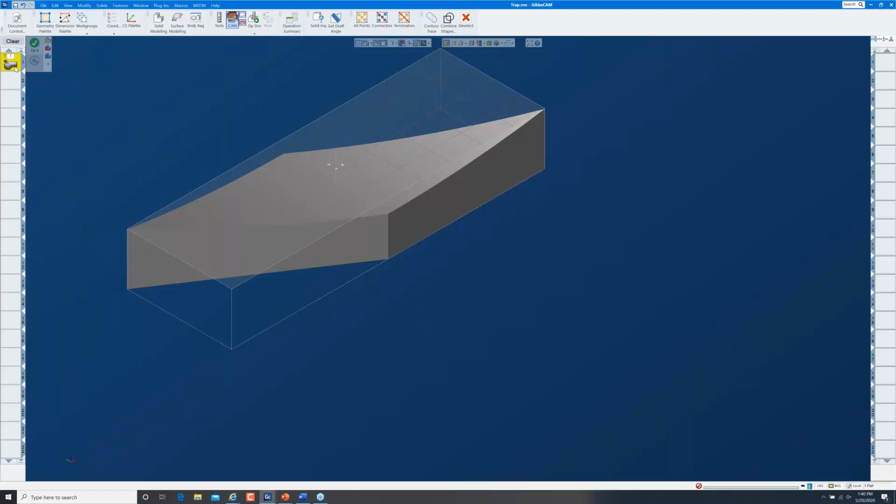But let me go ahead and create some toolpath on here. And I'll do a 5-axis toolpath, and we'll just stick with that 1/2-inch ball mill. I'm not going to worry too much about the details here. And I'll just do a morph between 2 curves. For morph between 2 curves, my drive surface is going to be this. And turn my edges on. Sorry, my first edit curve is going to be this one. And my second edit curve is going to be this one.

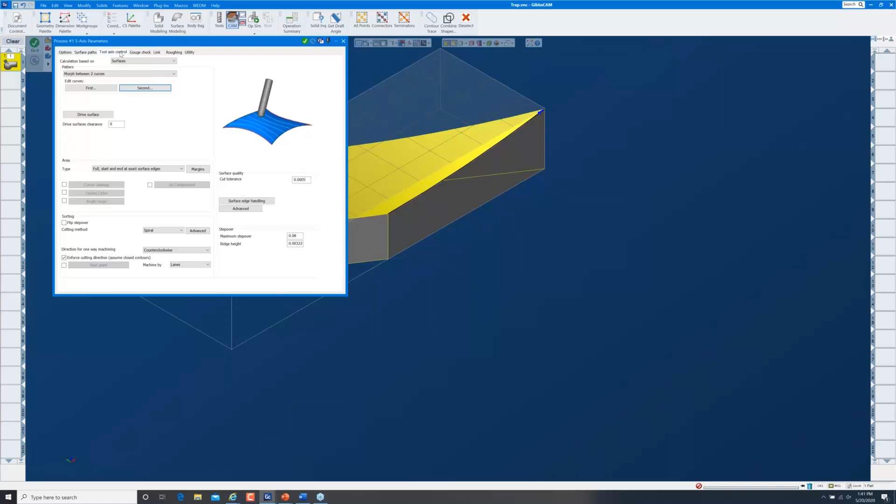And again, we can control this toolpath as 3-axis, 4-axis, or 5-axis toolpath very, very simply right here. I'll just leave it as it is, and I'm going to have the toolpath just stay normal to the surface. There's not a whole lot of 3D shape here. This is 3D shape, it's not flat. But let me create that toolpath.

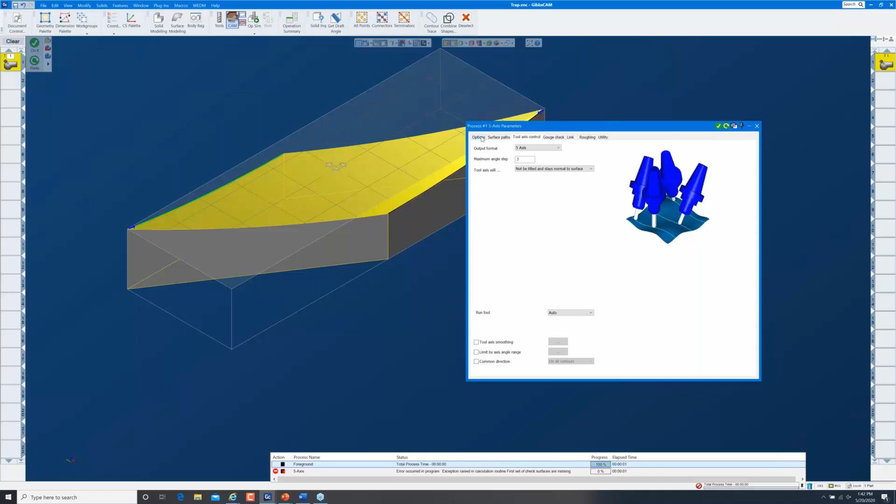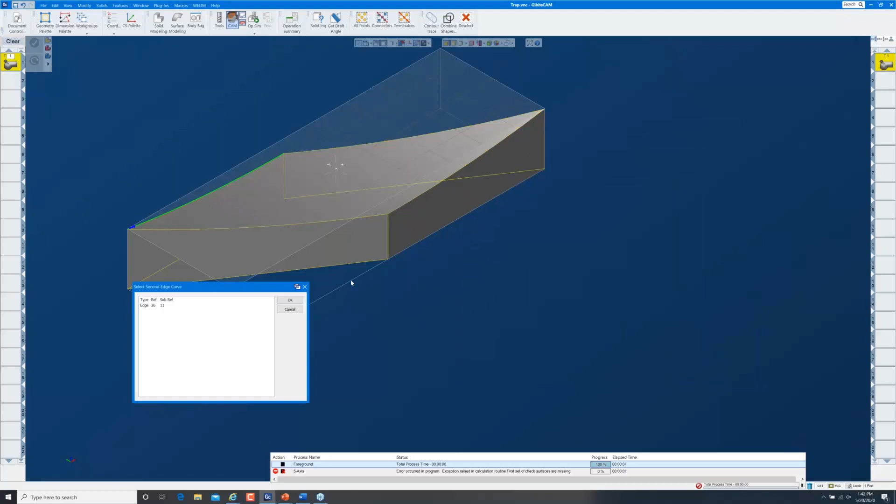And of course, you know what I forgot to do? I broke my own rule. I didn't hit restore defaults. So it had retained some of that information. So let me just do it the right way. So we're going to do a morph between 2 curves. We have the drive surfaces set. Our first curve is going to be there. Second curve is going to be there. And now we'll create the toolpath.

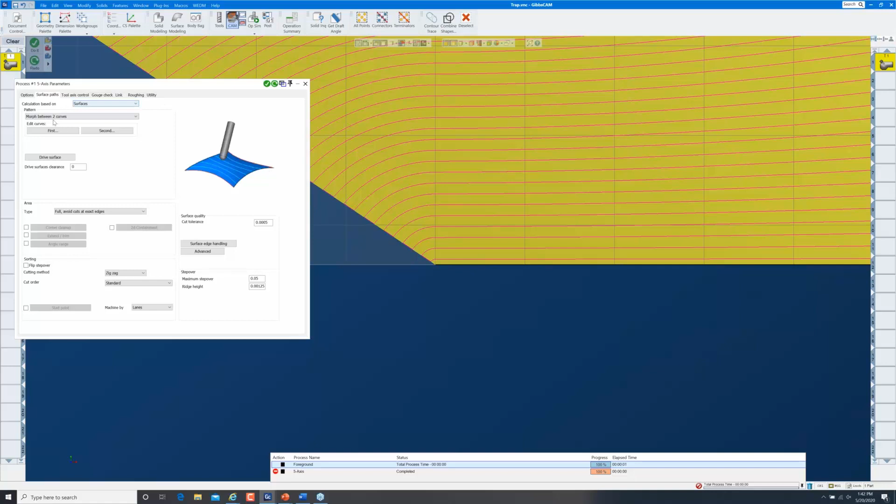All right, so a couple of things that I want to show you here. First off, we have a lot of retracts. The second thing is that this edge is straight, but these strokes are curving around that. As they go past it, they start wrapping around it because of the way offset toolpath is handled. Now, that can be handled with this surface edge handling choice. I just say extend the edge curve and recalculate it, and those strokes will just extend on straight without curving around the ends. And that's kind of the function of this part in my training class.

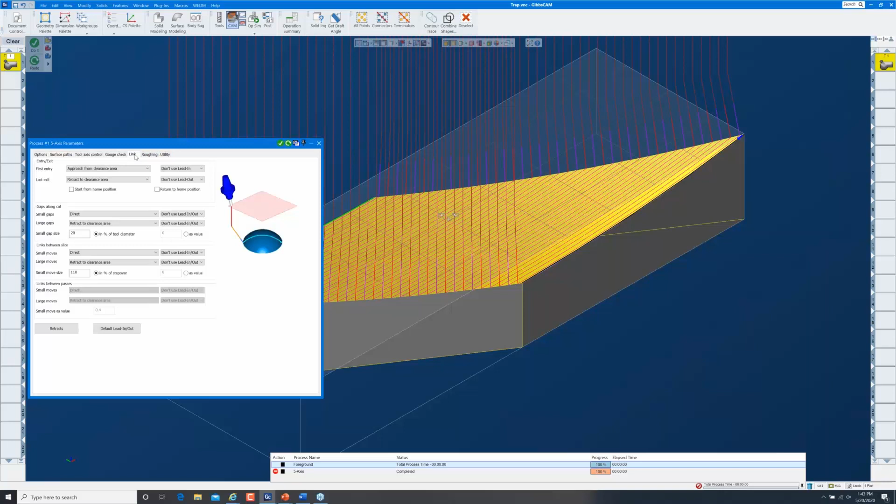But also notice that we've got a whole boatload of retracts now. And again, that's handled in the link page. Very, very easy. Each of these strokes is a slice. So from here to here is a slice, here to here is a slice. And right now it's told to move directly from one slice to the next if it's a small gap. But a small gap is just 20% of my tool diameter.

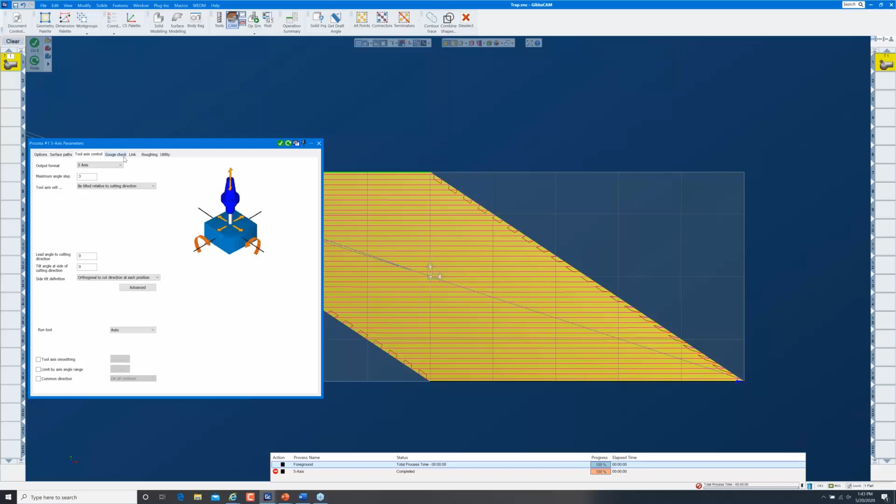And then, the link between slices, it moved direct between slices, and it's 110% of my step over. My step over, I believe, is 50 thousandths. So 110% of 50 thousandths is 55 thousandths. So if this distance from here to here at that angle is greater than 55 thousandths, then it considers that a large move between slices.

So a couple of things I would change here typically would be I would have it follow surfaces rather than a direct move. But also I would just change this definition from 110%, let's make it 500% of my step over. That's a quarter inch. So let's recalculate.

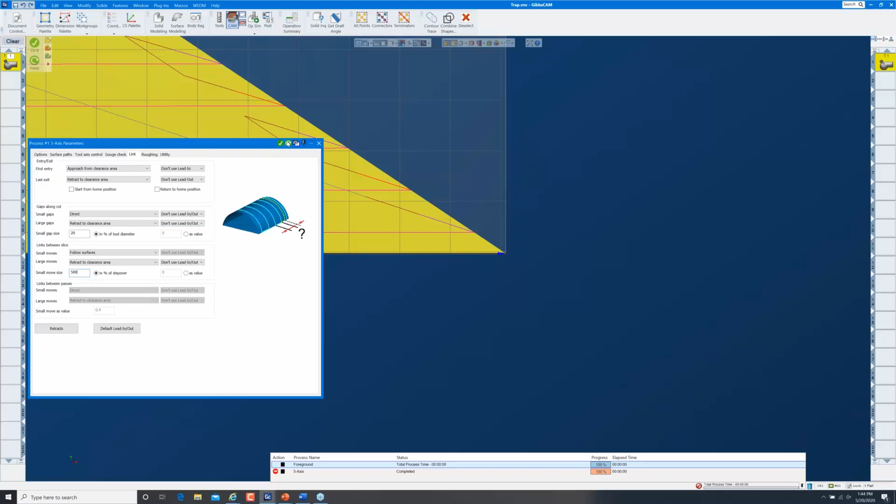And we have 1 entry move, 1 exit move, and no intermediate retracts. So the answer to the question is yes, we have very good control over retracts. Oh, fantastic. Looks like you've got a lot of control in the toolpath.

The next question is one that I'll take. It's a two-part question. And it says, if I already have a post for my machine, will it require an upgrade to support 5-axis? And the answer to that is yes. If it doesn't already support 5-axis, then you'll need to get an upgrade to do that. You can just work with your local reseller to determine what it'll take to get your post upgraded.

The second part is, how about if I don't have a 5-axis machine? Then the answer to that is no. As long as you have a post that supports the machine, let's say it's a 3-axis machine, then you don't need to upgrade it, because when you select just the 3-axis output, all you get is 3-axis moves. So depending on your situation, you may or may not need a post upgrade.

All right. Next question. It says, does GibbsCAM 5-axis support TCPC dynamic work fixture offsets? That's for you, David. Okay. The simple answer is yes, a resounding yes. GibbsCAM fully supports tool center point control and dynamic work fixture offsets. No issues there. Full support.

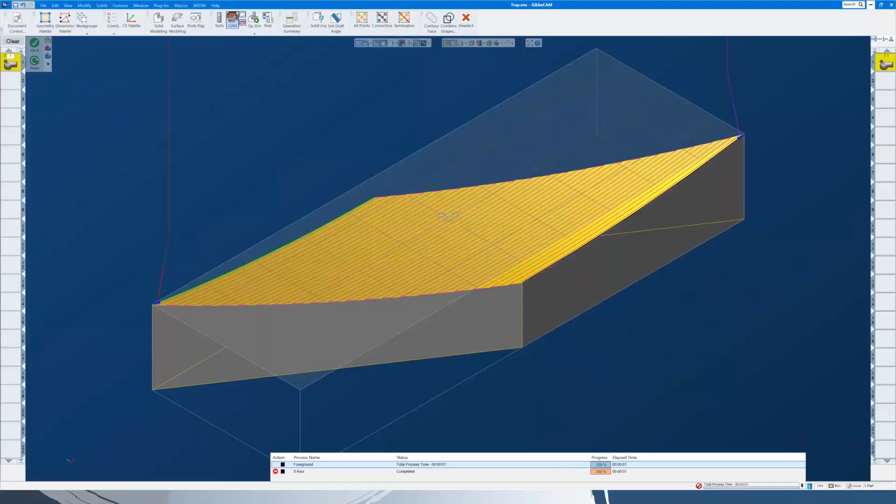Okay. Next question also for you. You showed finishing toolpath throughout your demonstration. Can the 5-axis module also do 5-axis roughing? Again, the answer is yes. Just real briefly, with almost any of the toolpaths that we select on the surface paths page, we have a roughing tab where you can define

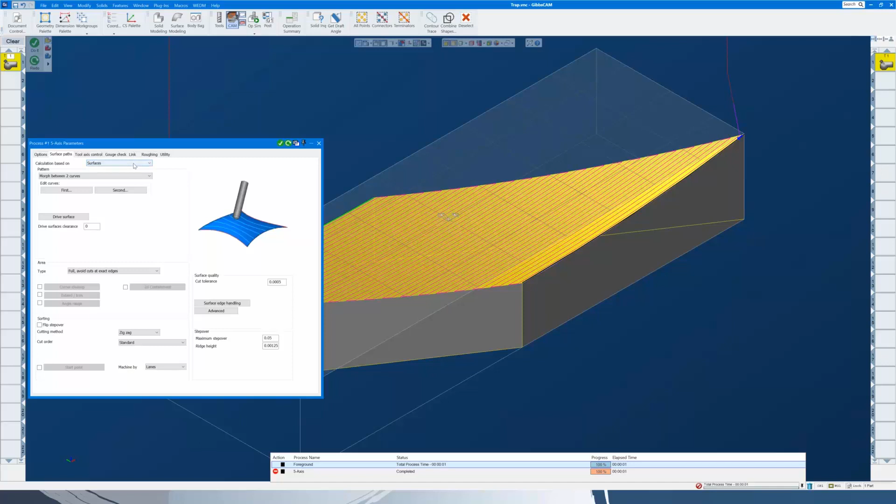roughing routines based on your stock definition, taking multiple passes, plunge roughing, morphing a pocket, depth cuts, area roughing, and so on. So there are a lot of options there for adapting a lot of the 5-axis toolpaths to roughing. But in addition to that, and to me more importantly, is we have this multi-axis machining,

which has great, and I mean great, roughing routines. And you can do offset roughing or adaptive roughing. It is very powerful, very flexible, very easy to use, frankly, and gives you some really powerful, very effective roughing routines. So the answer is yes.

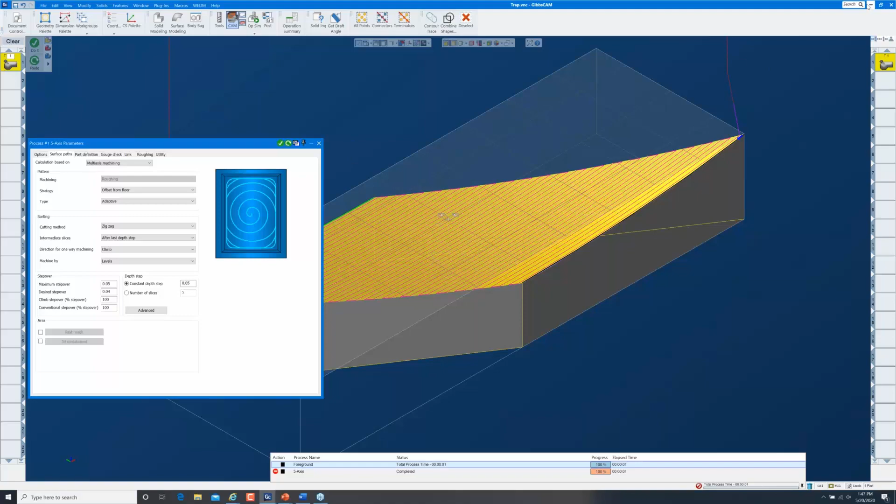The next one touches a little bit on what you were just talking about, and again, one for you: do I have to buy the multi-blade option to program a single impeller? No. While the multi-blade option makes programming an impeller a lot quicker and a lot simpler, as I mentioned at the beginning when we were looking at the options tab, all those specialty cut styles do is preset values and parameters that are available to you anyway in the 7 tabs.

Now, it can be very confusing on some of these really complex parts, the first couple of times you go through it, figuring out exactly what the combination is, and that's why, for these really complex parts, there are packages or add-ons that will handle that for you.

But I've got a customer that I believe is actually attending this webinar who just recently bought the 5-axis module, and I believe the very first part that he did with it was a 5-axis impeller. He does not have the multi-blade option, made a beautiful impeller, and that was either his first or second part with GibbsCAM 5-axis.